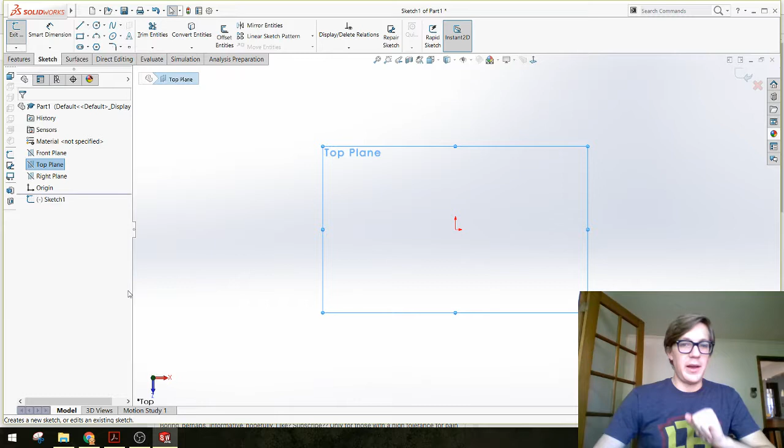So I'm just going to choose the top plane right now. Doesn't really matter. And create a sketch, and I'm going to make the base of my mailbox. All right. And I'm just going to add some dimensions that are dimensionally close. Again, this is a mailbox, so I'm keeping in mind about the size of the letters or small packages I imagine our users of this mailbox are going to be depositing or withdrawing.

So let's just say this is going to be about, I don't know, 120 millimeters wide and about 225 millimeters deep. We can always adjust those later. Notice my lines are all nice and black as opposed to blue. It means I'm all completely dimensioned. Nothing can move around on its own.

And I'm going to go ahead and extrude this to the thickness of my material. Everything I design for this mailbox is going to be the thickness of the material I'm cutting, which I mentioned before is 0.25 inches. Now if I type in 0.25 IN, hit enter, SolidWorks, good SolidWorks, is smart enough to convert that over to millimeters because I'm working in a metric environment, and that's great. So 6.35 millimeters is sort of the magic number. You'll see that pop up time and time again.

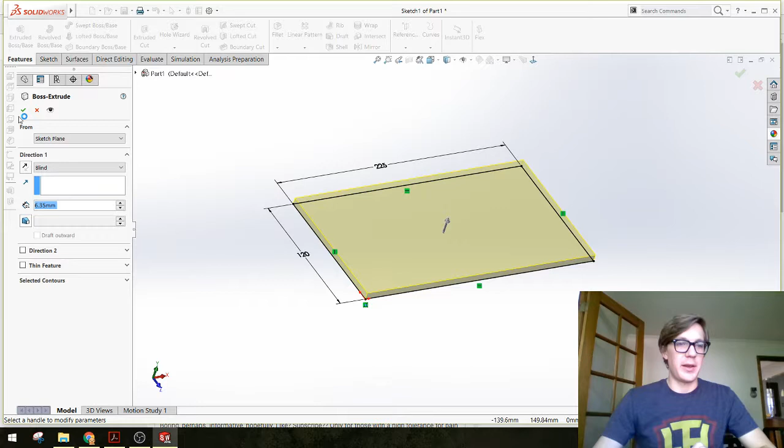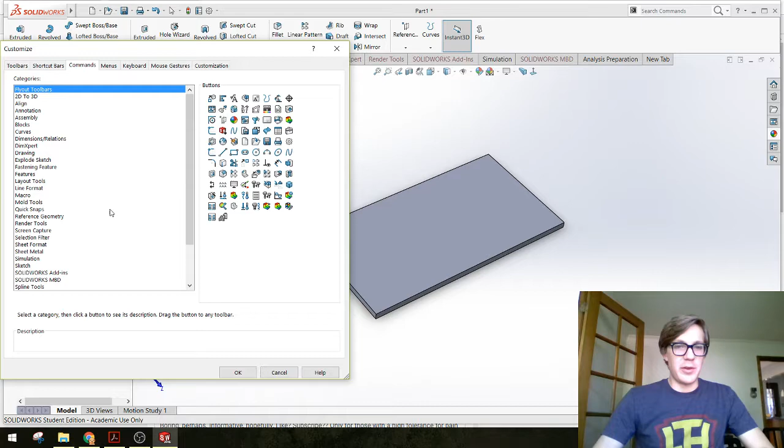I'm going to go ahead and say OK, and there's the base of my mailbox. Great. I usually like to look at it with perspective on. There's this little perspective button. Again, if you don't have any of these buttons in your menus, we've covered this a couple times, but you can always customize what's in your menus by opening up the customize menu, searching for the commands, and then dragging them in wherever you want them. You can also search up here for commands. As I think Dexter was mentioning before, you can search for a command, say like perspective. There it is, and I could drag this out and put it on my toolbar. Side note.

Okay, so I've got one component, and first thing, now that it's built, I'm going to save it just to make sure things don't go crazy. I'm going to actually start a brand new folder for this. All of the parts and the assembly file that you're creating should be in their own folder, and that's going to help transferring your files or moving things around a lot easier in the future.

So let's see, I actually have a folder for this already, and usually when I know I'm working with an assembly, I'll start by naming this, like this is a mailbox base part. I'll put the word part in the file name. It's easier for me to remember what parts are parts, what are assembly files, and you'll see as we build all these out why that's important. All right, so save, there we go. Okay, I have one part. Now I can get started on my assembly.

There are a couple ways to bring a part into an assembly file. The first way I'm going to show you is, if you move your mouse over to this little caret, go to the file menu, you can say make assembly from part. So I'm going to click that. That's actually going to create a brand new file, which is a completely different file type called an assembly. You'll see up at top here, Assem1 is the default name. And it's going to bring up this little menu that says begin your assembly with that open document. And all I need to do is say green check mark. And SolidWorks will bring the part I was just working on into my assembly file.

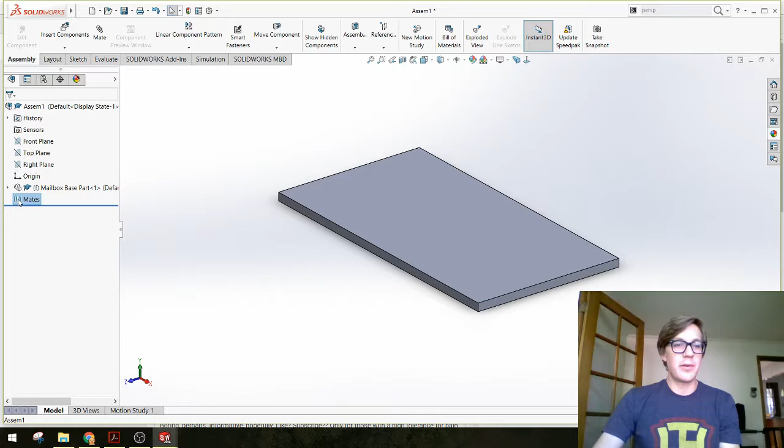It looks almost identical to what I had just built. Actually, this geometry is identical. What's different, there are a couple things. One, you'll notice I have a brand new tab up here in my menus, which is the assembly tab, and it has a whole bunch of special things that we can do in an assembly we can't really do in a part. We'll get into that. You'll also notice that in my feature tree, I have the normal planes, history, sensors, origin, but instead of features, I have the entire part. There we go, mailbox base part 1 is sitting over here in my feature tree, and it has its own set of all of the things that you would find in a part file. You'll also notice that there's a mates area, and we'll get into mates pretty soon too.

So, okay, I've started my assembly. I'm going to go ahead and save that as well. I like to name assemblies like assembly, and this is my mailbox. And I'll say okay, it's in the same folder that my other parts will be saved in, and we'll note that it's an assembly type. It's not a part type. So I'll say save. Wonderful.

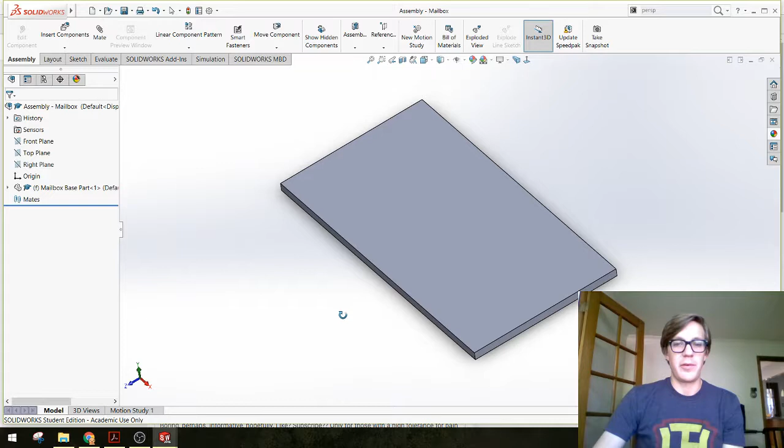Okay, let's start a new part, a brand new part, and I'm going to build one of the sides of my mailbox. So here we go. Oops, show that. Just hide that again. Start a sketch. And the side of my mailbox, well, I'm going to make it a rectangle. And let's say I would like it to be 150 millimeters tall. Maybe a little taller than that. I can always change it.

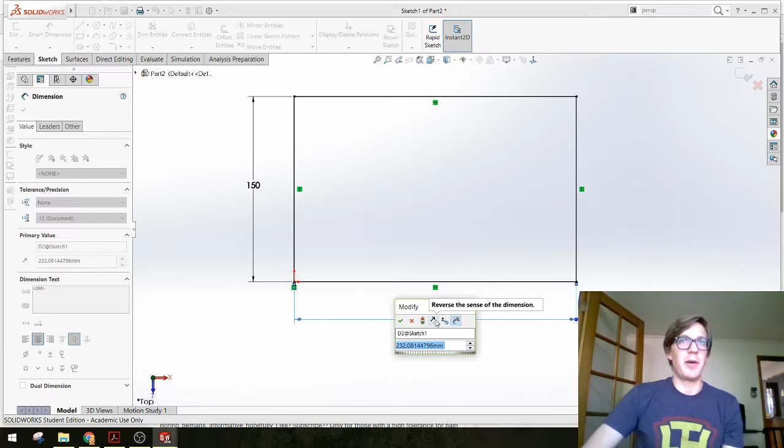And how wide? Well, I guess how deep, how long should this mailbox be? Probably I want it to be about the same length as the base of my mailbox. And if I don't remember, what was it, like 225? I'm going to put that in. Hit escape to get out of my dimensioning tool. This is the first little pro tip.

If you have multiple part files and assembly files open, you can hold the control button down and then tap tab to bring up a list of all of the things that are open right now in SolidWorks. And you can use your mouse to click one, or you can press tab, press tab, press tab to sort of cycle through. I'm going to go back to my mailbox base.

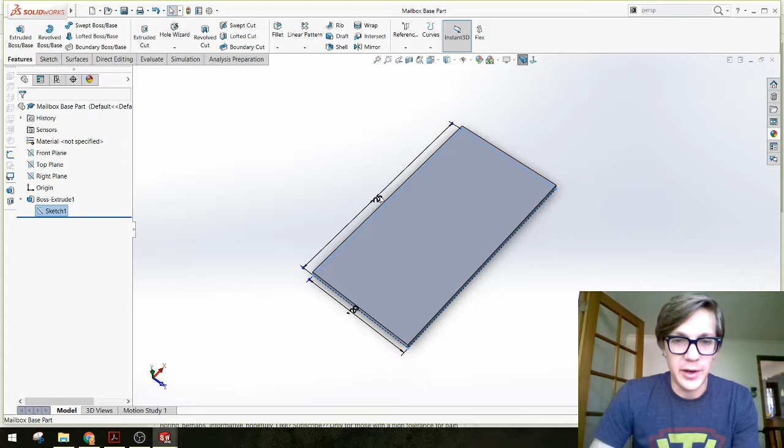Remember, we built this first, and take a look at the dimensions and just double check. Yeah, 225. Okay. Now I'm going to go back, control tab to get back over to my part, and make sure that it matches up. Yep, looks good. We're going to extrude this 6.35 millimeters. That's the thickness of our material. I'm going to say green check mark. Okay. I'm going to save this part, Control S, as my mailbox side part.

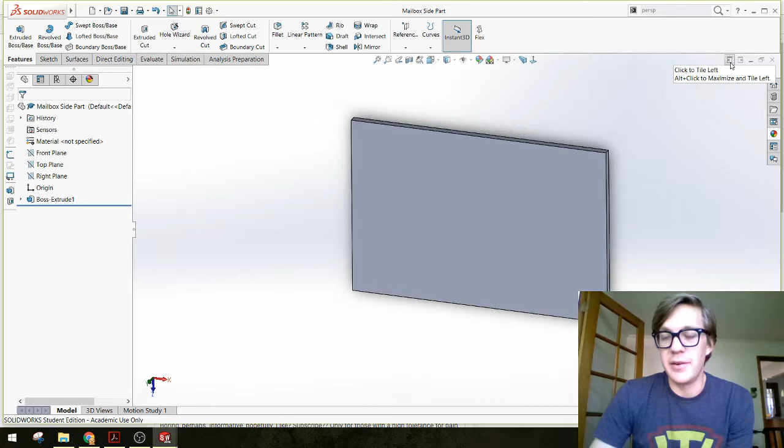Okay, cool. Now, last time we went up here and said File, Make Assembly from Part. Well, we already have an assembly file started, so I don't want to use this option. Instead, I'm going to go back to my assembly. The other way that you can do this is, actually, these buttons are kind of neat too. Each of the files that you have open in SolidWorks has its own window. It can get kind of confusing.

You can maximize, minimize. Really, you can minimize a bunch of parts until you find the one that you want. Mailbox base part. No, I'm looking for the assembly. Aha, assembly mailbox. I'll maximize that guy. And there we're looking at our base part. I want to bring in my side part into this assembly.

So one of the other ways that you can bring a part into an assembly is in one of the tabs up here called Assembly. In the Assembly tab, you can insert a component. So I'm going to click that. And which part or assembly, yes, you can insert an assembly into an assembly. Which part do I want to insert? I want to insert my side part.

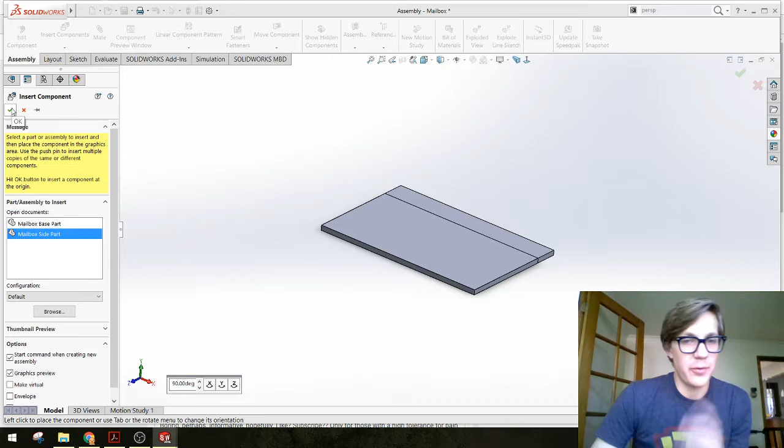And I could say green check mark, but for a reason I don't want to talk about at the moment, I'm not going to do that. Instead, I'm going to use my mouse and just click somewhere out into my build area, place this component. And you'll notice, well, it's not oriented correctly. This is where one of the most important tools in an assembly comes in, and we're going to get into it right now. It's called mate.

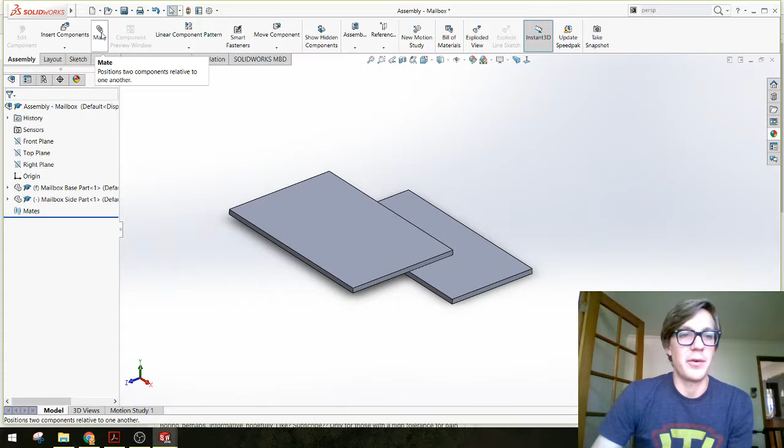So a mate is a constraint, kind of like the constraints that you can add inside a sketch to make two lines perpendicular or parallel or coincident. Within an assembly, we can use a special kind of constraint called a mate to attach entire parts to one another in a specific way. And there are a couple ways we can do this. The first one I'm going to show you is I open the mate menu. So click mate. I'm going to use two faces. I'm going to mate them together, make them flush.

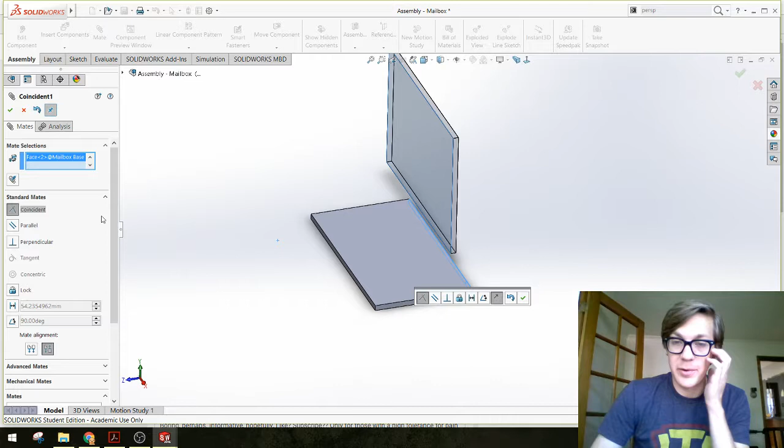So I'm going to click one face, and notice I click it and it kind of disappears and also highlights it. So I'm going to attach that face to this face. And you'll see that SolidWorks kind of reorients the part in the way that I would like it to be mated. And it's a coincident mate. By default, SolidWorks will kind of pick one that it thinks you want to use. You can hit green check mark on the little special menu that pops up, or you can hit green check mark up here.

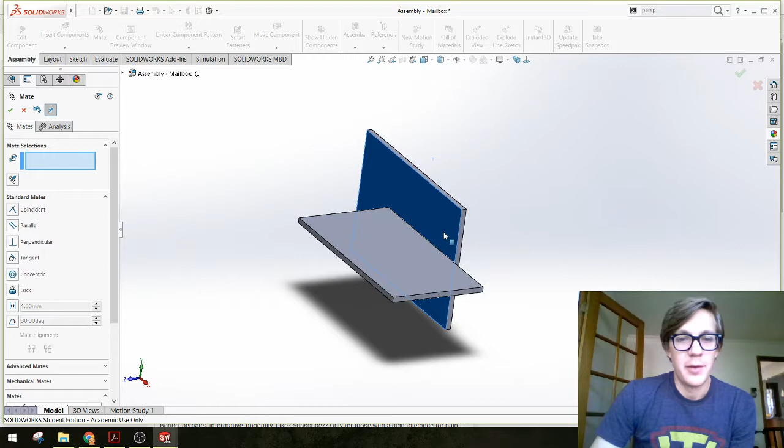And then this menu should stay open to let you add other mates. If it doesn't, just go back into mate, it'll reopen. All right, so that's one mate. Now notice I can still drag this part around, but no matter where I drag it, it's coincident. My face here that I selected is touching the face here that I selected.

All right, let's make this face and this face coincident also. See what happened there? They're all lined up, and again, green check mark. I can still move this thing around, and I think I want this face and this face to be coincident also.

Just as a point of an interesting other thing that you can do, let's say I wanted to leave a little space. Maybe I want my side to hang down a couple millimeters to leave the base not flush. Once I pick two faces, another mate that I can add is a distance mate, as opposed to a coincident mate, and it will let me add a dimension, say 5 millimeters, that those two parts, green check mark, maintain.

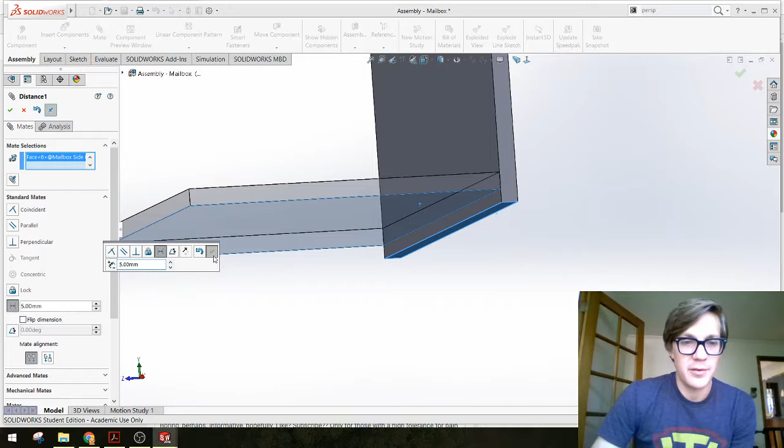So this part, if I try to drag it around, still is fully defined. It can't be moved, but it has that distance inside here if I want to keep that distance. Okay, so there we go. I have two parts, my side and my base. In my assembly file, I'm going to say green check mark, all done with mates for now, and Control S, save my assembly. Great.

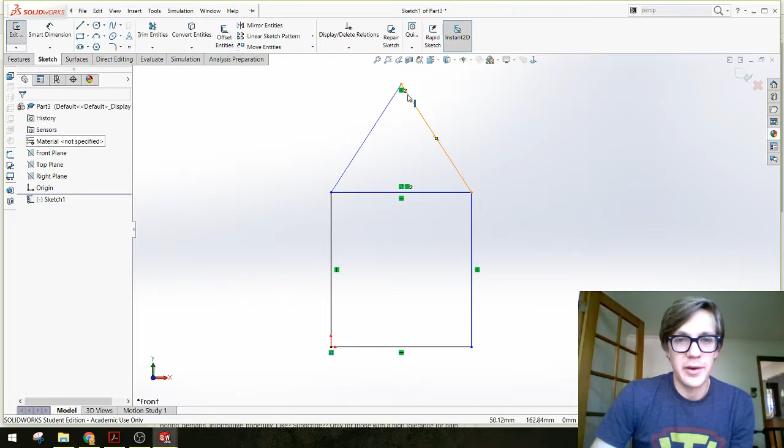All right. Next thing I'm going to do is build the back of my box here. And just like the other demo, I'm going to make it a different shape, kind of make it look like a house. So let's start yet another part file. I'm going to make a sketch. I want this to look something like a box with a roof on top of it. Let's see here. Maybe to make this, make these constrained vertically so that it always stays in the center. It's kind of neat.

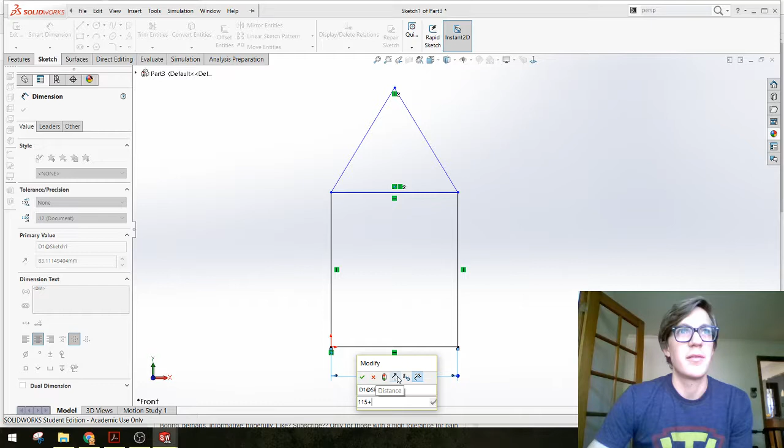How wide should this be? Well, how wide was our base part? I think it was 115. And I think I wanted to cover both material thicknesses, and you'll see what I mean here. I'm going to add 6.35 twice. And I can actually type in plus 6.35 twice, and it will give me a new width. You'll see why I did that when I import this part in.

I want this to be the same height as my other one, which I think was like 150 maybe. I can always go check this. I want my roof to be maybe another 75 millimeters tall. Again, this is all based on whatever design it is that you've sketched out that you're trying to mock up. And it looks like all my lines are black.

I am going to get rid of this line in between here for my extrusion with the trim tool. Power trim is my favorite version. I'm going to click and hold, and you'll see I'm dragging this trim line and cut that out. Oh, it looks like it got rid of one of these dimensions. Oh, and it got rid of my constraint too because I deleted the line. The other thing I could do, I'm going to undo, Control Z a couple times here.

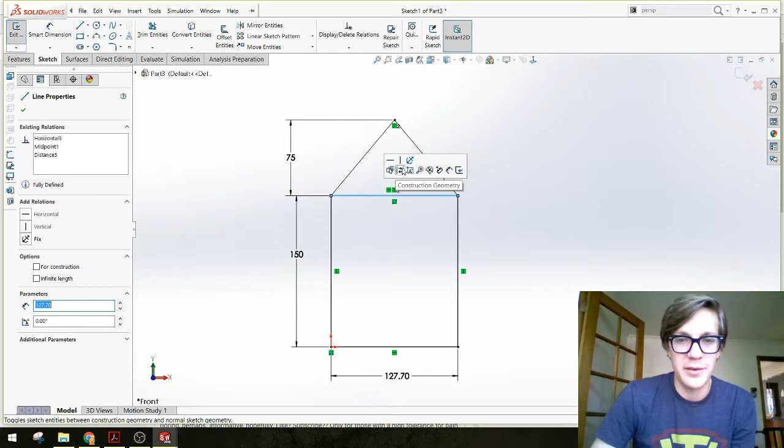If I don't want this line to interfere with the extrusion I'm going to do, I can change it to construction geometry with this little shortcut, or over in the menu here say this line is for construction. It will turn it into a dotted line, and now you can see I have one continuous shape that I should be able to extrude, once again 6.35 millimeters, to make my house shape. All right, let's double check those dimensions really quick.

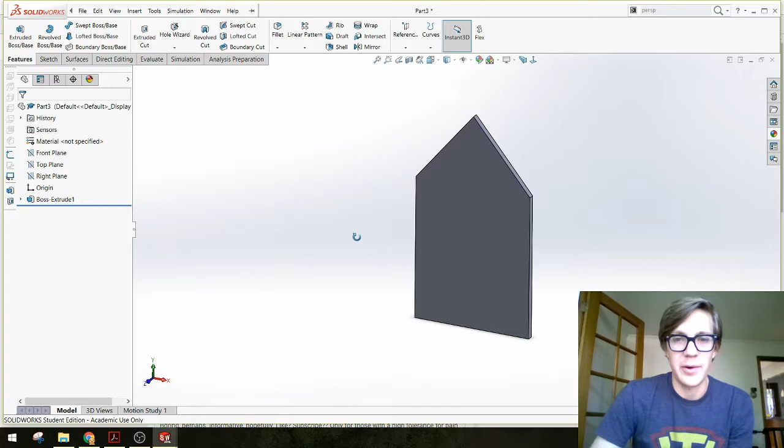So I'm going to go back to my side part, click on my boss here, the dimensions should pop up. It's 225 long, 150 tall. I'm going to Control Tab back to my part here, 150 tall, and I guess the length isn't important, 150 tall. Is that right? I already forget. Yeah, 150, okay. Cool, so that part's ready. I'm gonna Control S, save that.

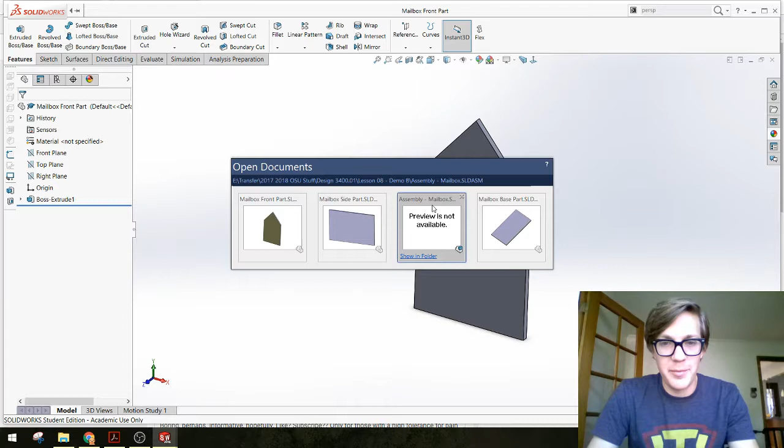Mailbox front part, save. Control Tab over to my assembly. Notice it says assembly, mailbox. Here it is, and I'm going to import a part once again using my insert components. Mailbox front part, there's the part. I'm just going to click somewhere out here to put it where I think it should go. And I'm going to use mates again to get this lined up.

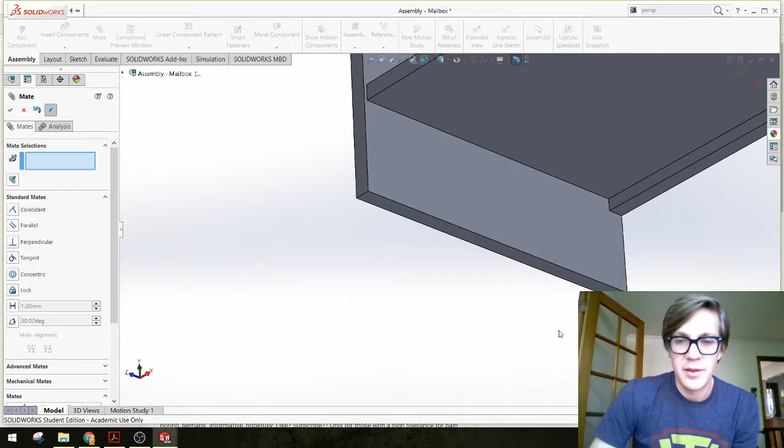All right, so let's say I want this face to mate up with this face, and then green check mark. I want this face to mate up with this face, green check mark, and I want this face to mate up with this face, green check mark.

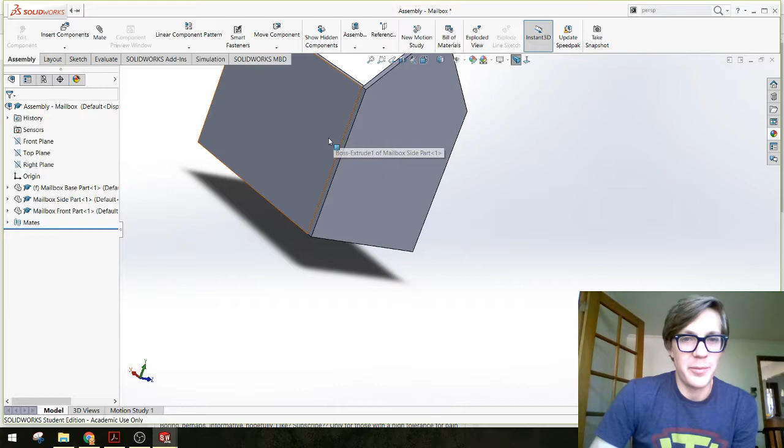All right, now it looks like I might not have had quite the right dimension on the width of this part. Oh, no, I don't want to start another mate here. You can see that I wanted the edge of my face here to be lined up with the edge of the side part. Hopefully, if I added another side part to the other side of my box, this edge would be flush with the outside of the box too. It doesn't look like that would be the case. So there are a couple ways that we can change this.

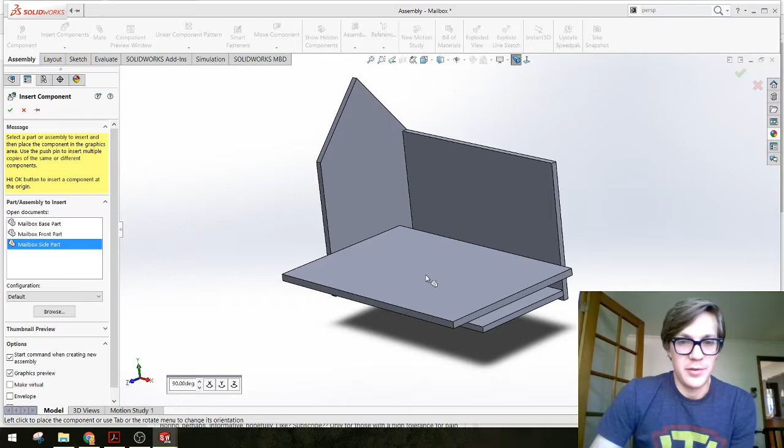Before I get into that, so I make sure I have the right dimension, I'm going to show you another fun tool in assemblies. This is based on a question I think Tessa asked during class. She asked, can I bring multiple instances of a part into an assembly? And the answer is yeah, absolutely. Let's say I want another side for my mailbox here. I can insert a component, choose mailbox side part again, just click somewhere out here, and here we go. I have a completely separate instance of my side part, which then I can mate.

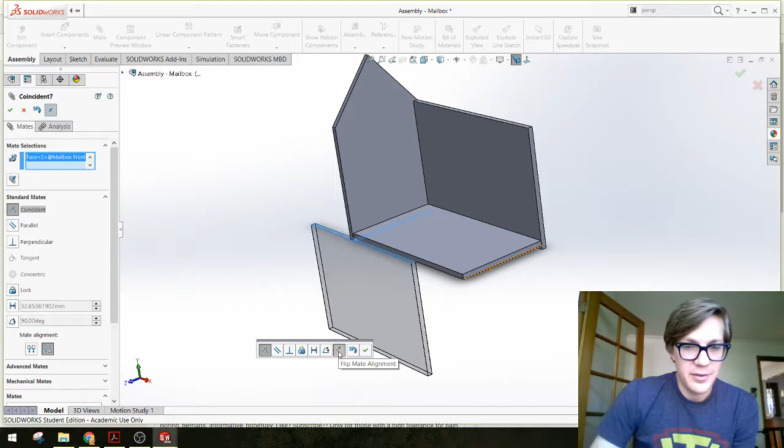So I want that coincident with that. Now notice that actually flipped it sort of the wrong way. There is a flip mate alignment button that will let you switch things around if the mate that you're trying to add ends up being sort of the opposite. I want that face coincident with that face, green check mark, and I would like this face to be coincident to that face, green check mark.

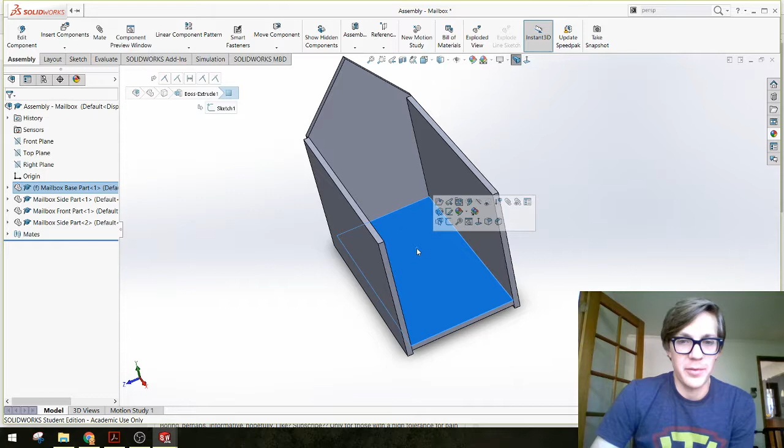Okay, now you can see what I'm talking about here. I wanted this edge to sort of cover up the face of this thing right here. So green check mark out. Let's check some more dimensions. All right. Now, I know I've been doing a lot of control tabbing to get to other parts. Another way that you can go back and see a part or edit a part is click it in the assembly and then use this little open part icon that pops up, and it will bring you right to that part file.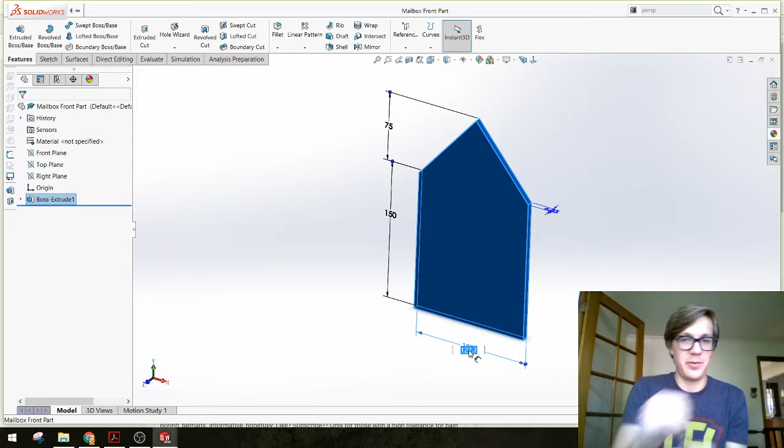Let's see. So this is 120 millimeters. I think I typed in 115. So 120 millimeters is the width of my base. And if I control tab over to my mailbox front part, I think I mistakenly said this was 115 plus 6.35 plus 6.35. Remember, I was trying to add extra material to cover up two material thicknesses. I know now it's 120 millimeters plus 6.35 plus 6.35. Say OK. Save this part, and then go back to my assembly.

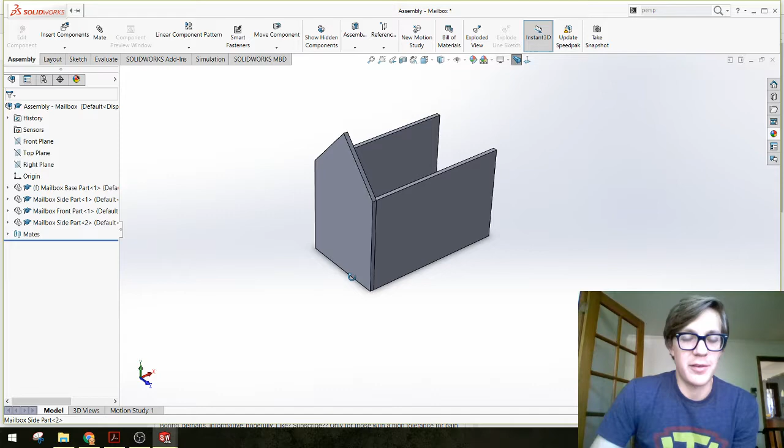Now, when you update a part that is also in an assembly, chances are this little warning is going to come up that basically asks you if you want to update the assembly to match the changes you made in the part file. And I said yes. Okay, and now you notice that extra dimension updated everything, and the front of my mailbox now covers up all the edges. That's what I wanted.

Okay, now I could bring another instance of this part in. Actually, you know what, why don't we do that really quick? So I'm going to save my assembly. Again, with SolidWorks, just save everything all the time. SolidWorks likes to crash at just the right moment. I'm going to insert a component. We're going to add another front part. Just drop it somewhere in my assembly.

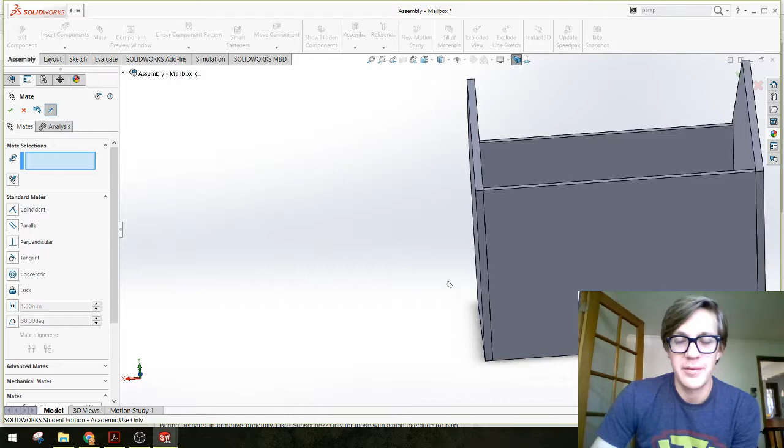Use mates to make this face flush with this face, green check mark. This edge flush with that edge, green check mark. And the bottom here flush with the bottom here, green check mark. Okay. I've got a box, starting to look like a house. I guess we're getting close to what I want this thing to look like. Green check mark. I'm going to save one more time.

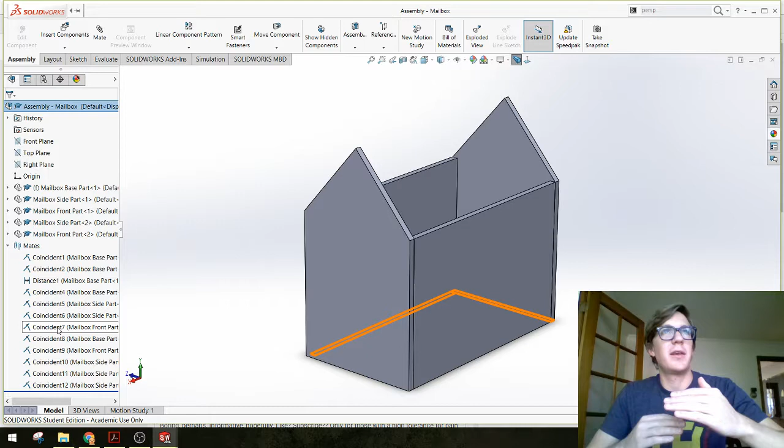All these mates that we've been adding have been populating in this mate list over here in the feature tree in your assembly file. This is important because sometimes when you edit a part or you change a part or you delete a part, things will blow up, just like in a part file. If you change something, features will turn red and give you an error.

A lot of times in an assembly, what can go wrong when you change a part is mates, like other relations, they'll stop working. So you can go back into any one of these mates and edit it, delete and reselect faces, or just get rid of the mate altogether. Anyway, that's where that lives, and we'll see if we can't get something to fail so I can show you how to troubleshoot it and fix it.

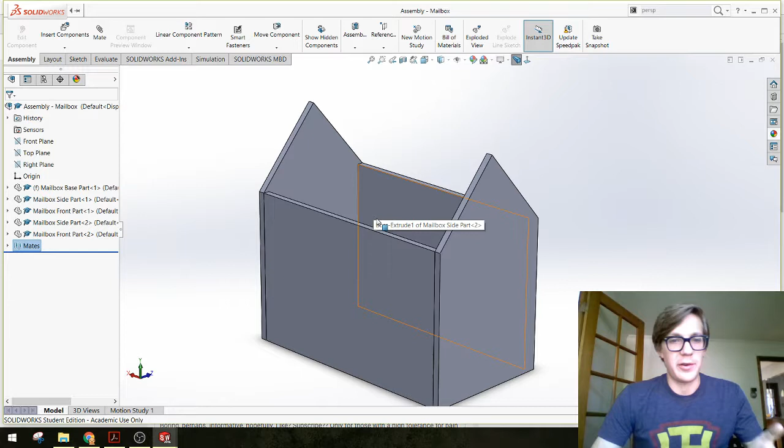Okay, so far we have built a few parts as independent part files and brought them into an assembly. And now I'm going to show you a different way to create a part for an assembly. And this, I guess, has its advantages and disadvantages too. So another way that you can add a part to an assembly is creating it inside the assembly from the get-go.

So under the Insert Components feature in your Assembly tab, if you hit the little caret, in addition to Insert Components, you can also say Create a New Part. So I'm going to create a new part, and you'll notice, maybe, that by my mouse there's this little green check mark that appears. SolidWorks wants me to click somewhere in this viewport to start my new part.

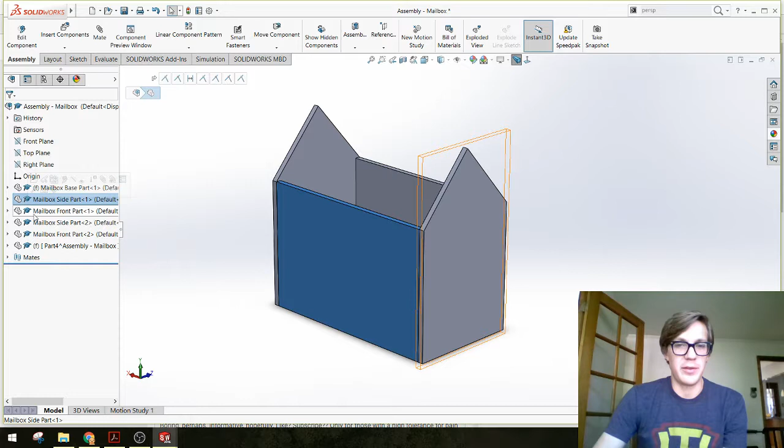Just know that this happens, and you have to do it when you create a new part inside of an assembly. You'll see a brand new part appear in my feature tree with a default name, Part 4, Assembly, Mailbox. It just added a new part, but there's no geometry in that part yet. If I click this part, unlike the other parts, nothing is highlighted because there's nothing in that part yet.

In order to add geometry into that part, there are a couple ways I can do it. I can open that part, which is a little abstract. What I'd like you guys to do is to edit the part. So I'm going to edit this part in the assembly. It's a part file inside an assembly file that doesn't have geometry yet. We're going to create some geometry.

When I edit the part, it will ghost out all of the other parts in my assembly and give me the same set of commands, like sketch tools and features and direct editing, that I have in a part file normally, only I can use these other parts as reference. So what I want to build right now is one of the roof areas for this mailbox thing I'm creating.

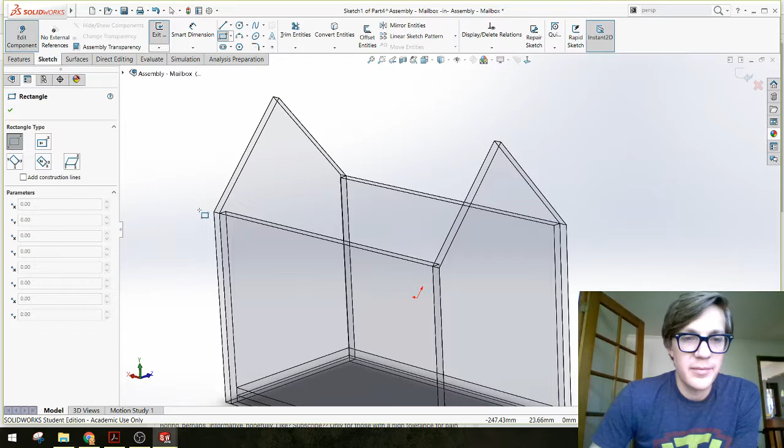Just like any other part file, I can sketch, and I'm going to pick one of these faces on the top of my roof to create a sketch. Say sketch, okay, and I'm going to make a box that's a little bit bigger than the top of this mailbox.

I can add relations, like between this line and the top edge of this part. Zoom in a little bit. I'm going to make them collinear. It's actually adding a relation to a part that's outside of the part file that I'm editing. Again, this is kind of abstract if it's not quite making sense in your head right now. Just know that we're creating a part in a slightly different way than you would if you're creating a part outside of an assembly file.

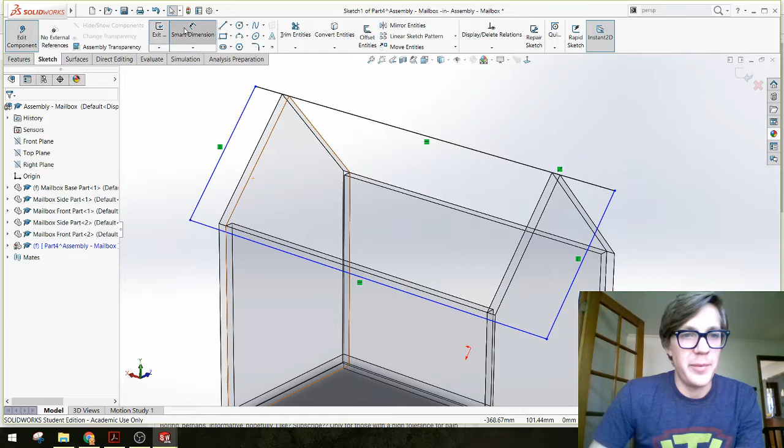All right, let's add some dimensions to this sketch here. Let's say I want the distance between the outer edge of my mailbox to the outer edge of my roof to be, say, 30 millimeters. I can still use the normal tool to square up and dimension things this way too. I want that to be the same, 30 millimeters. And I want my roof to be, let's say, 120 millimeters long.

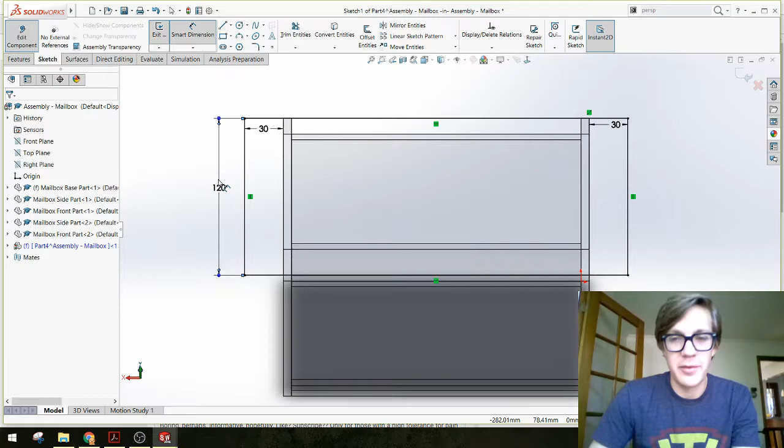If I rotate this, you can see I'm adding a little bit of an overhang to the edge of my house mailbox thing. Okay, that sketch, everything is black, so I'm happy with that. Go back to the Features tab.

Now notice one extra set of things is happening when I'm editing a part inside an assembly. I have this extra set of things on every single tab that say edit component, no external references, assembly transparency, this kind of thing. We're going to talk about this in a second. Ignore these for now. All of your tools that you're familiar with will still be in these tabs, just in a slightly different location.

So anyway, create an extruded feature. How thick? One material thickness, again, 6.35 millimeters or 0.25 inches. It should convert for you. I'm going to say OK.

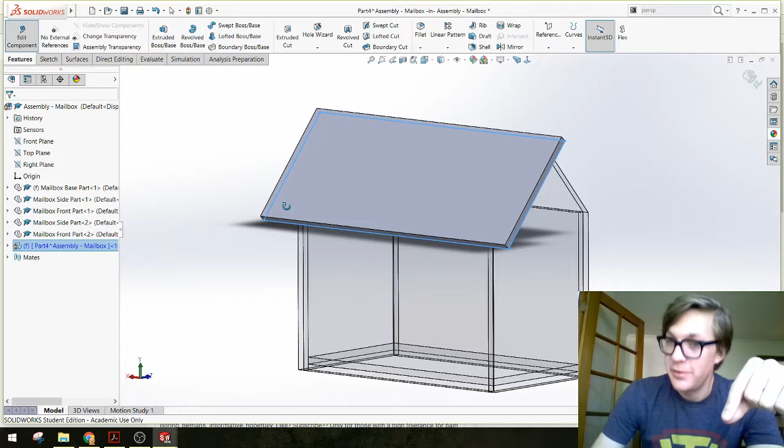Now normally when we create a feature in a part file, we have to pay attention to whether or not we want that part to merge with another part. That still applies here, except SolidWorks knows not to merge this part, or anything we create as part of the part we're editing, to anything outside the part file in the assembly file. This will never merge with any of these.

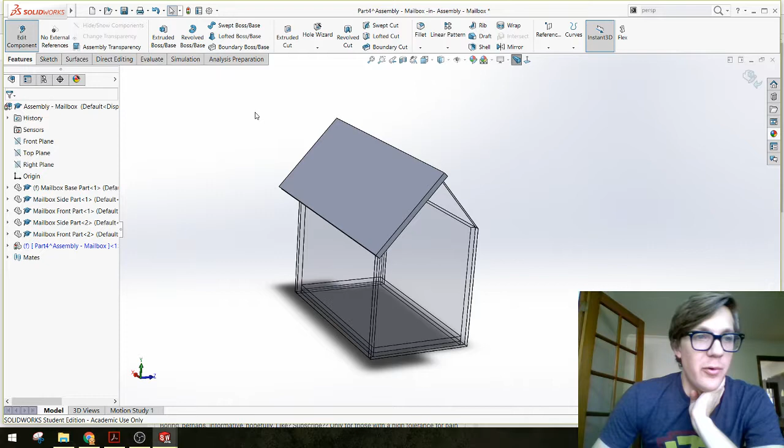Okay, so there's my roof, or part of my roof, and that looks about the way I want it to. So there's one layer I'm going to try to get out of to get back to editing things in my assembly. You'll notice over here, the same place where you would exit a sketch, or up here where it says edit component, if I click this, it will bring me back out of the part file I was editing inside the assembly file, and now we're back into the assembly file itself.

You can see that all of my parts are unghosted, and they look the way you guys are used to seeing. All right, let me save really quick. Ooh, an extra menu popped up. The following models referenced in this document have been modified.

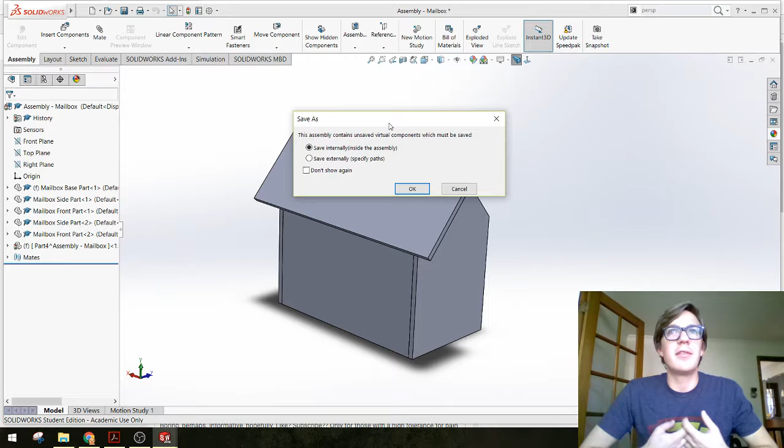They will be saved when the document is saved. It's talking about this random part we created that we haven't given a name, our roof part here. It hasn't been saved at all. So I'm just going to go ahead and say save all. SolidWorks will ask me whether I want to save it inside the assembly, like as a part of the assembly file, or save it externally as its own part file. For now, probably the easiest thing for you guys to do is just say okay, save it inside the assembly, and leave it at that. I'm gonna save one more time just to make sure all of those options happened.

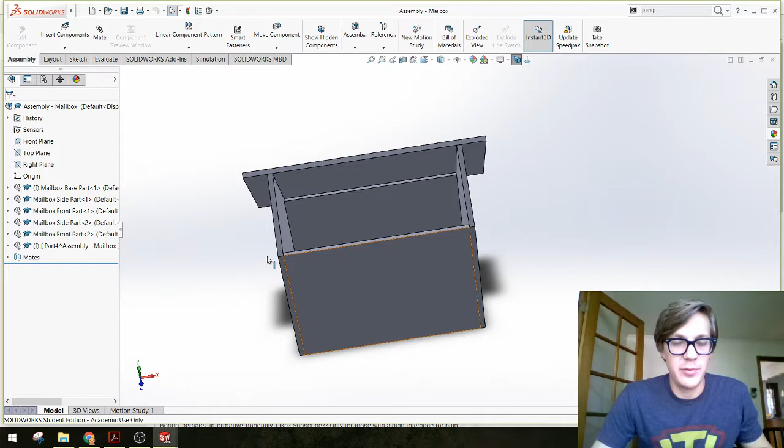If this menu ever pops up about rebuilding your document before saving, go ahead and rebuild. Okay, so I have a roof. I've got front twice, front and back, two sides, a bottom, and part of a roof. Let's create the other side of this roof really quick. And let's see, is there a third way that maybe I want to do this?

Well, that's interesting. Actually, as I'm looking at my part file from this direction, and I'll turn perspective off, notice the angle of my roof here on this part must not be 90 degrees, unlike the material here. And if I want the next part of my roof to line up perfectly, I could go back and edit this part. So let's do that really quick.

All right, once again, let's say I have a part inside an assembly that I want to change something about. There are two ways to do it. I could click this part, say open it, it will open the part file back up, and I can go back into my sketches and change things. That's one way to do things.

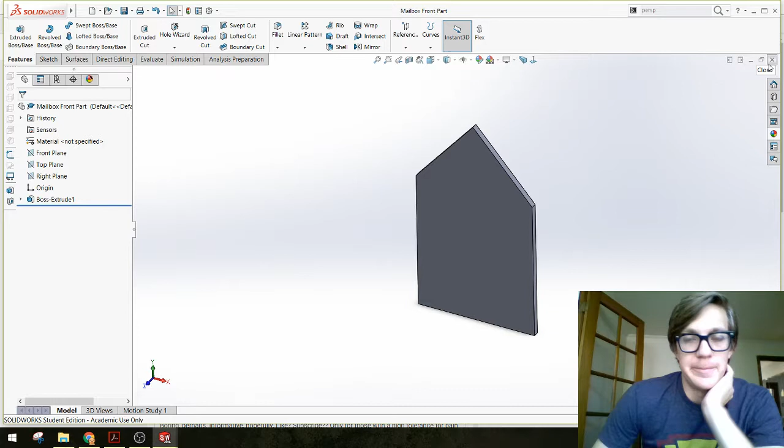The other way that you can do things, let's go back to the assembly, is click the part, and instead of opening it, I can just go right into edit it. Where is it? Edit part. I could click it here, or I could click over here and say edit part. Same kind of crazy thing happens, right? All of the parts I'm not editing get ghosted out, and I can open the feature tree for just this part inside my assembly file and mess around with things.

For example, let's say I want to change this sketch. I'm going to edit the sketch. Let's square up to it and change this so that it's a right angle. Now I have a feeling if I try and click these two lines in my sketch and say make them perpendicular, ooh, things are going to get angry.

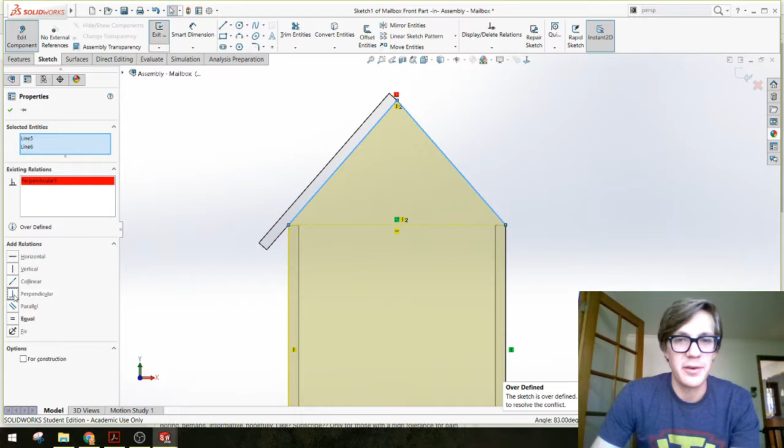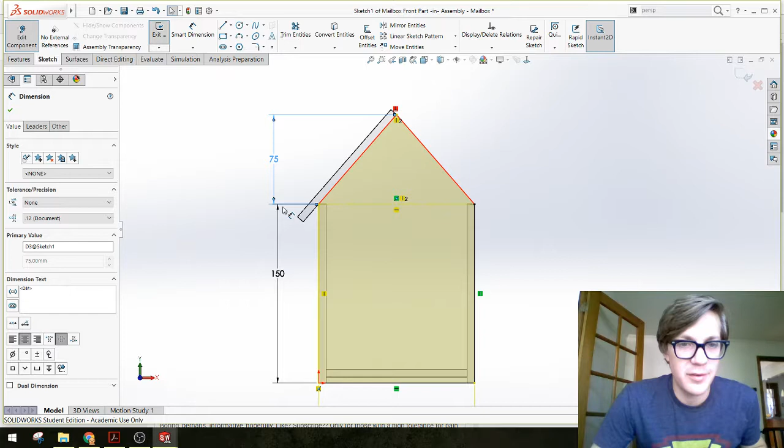And I have a feeling, I know why, it's probably because in order for those two lines to be perpendicular, this point is going to have to move, either up or down, probably down. So right now my sketch is over constrained. SolidWorks can't figure out which things it should follow to create the sketch. I'm going to click this dimension here and delete it.

And it looks like that's all it took to fix my problem here. Now if I went back in to add a dimension between this point and this line just to see how tall it was, it's going to ask me if I want to leave it driving, meaning have SolidWorks treat it like it's trying to tell the sketch exactly how tall to be. Once again, you'll see everything starts to go yellow or red, which means it's unsolvable.

I could also change it and say, make this dimension driven. And I'll show you what that means really quick. Basically, it leaves this dimension grayed out. This dimension is not actually controlling my geometry. It's just sort of there as an indication of how tall this box is. That's kind of a wormhole side thing, but I figured we could talk about it because it was something I wanted to change.

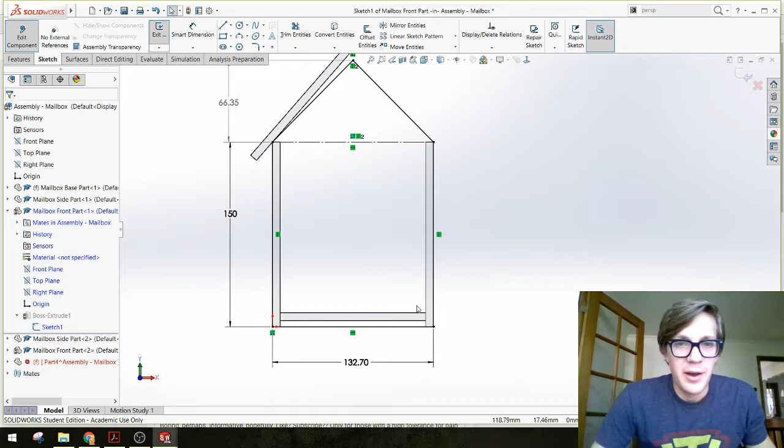All right, I'm going to get out of my sketch. Notice the part updated. And if I get out of the part, notice that the assembly updated too. The mate that we added between my roof part and, oh, I guess we didn't add any mates because we built it as a part inside an assembly. Everything updated and we're okay.

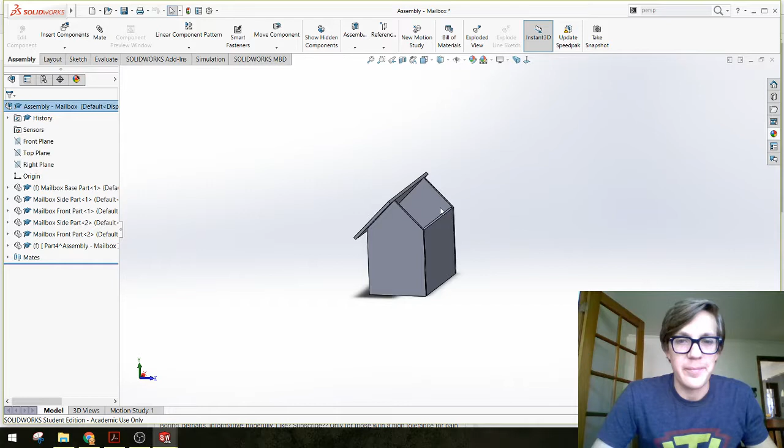That's cool, and it looks like everything is all squared up. So I can create one more side of my roof. Great, so let's do that again. I'm going to create a new part inside my assembly. And again, I have to just click somewhere out here to say yes, I wanted to create that part. The part has no geometry in it. In order to add geometry, I have to open the part file or edit it. Let's edit that part I just created.

To make a sketch, I'm going to have to pick a plane to sketch on. I'm going to sketch on this side of the roof. Sketch. We're going to make a box.

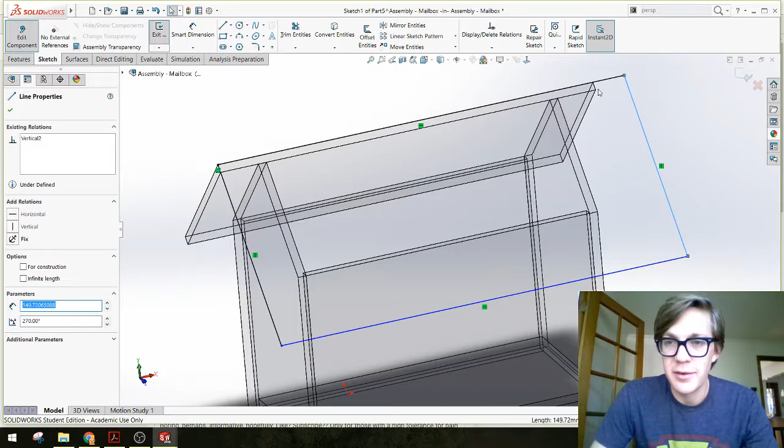Notice when I created my box, I picked the corner, the top of my roof part up here. I'm also going to constrain this line so that it's even with my roof. So I shift click to the edge of my roof file. And then how long do I want this to be?

Now I'm thinking I could probably say I want this line to be even with this line, collinear. Oh, no, didn't work. Let me undo that. That did not work the way I was expecting. Oh, because, yeah, I see what's going on. Alright, instead, maybe I can say make this line...

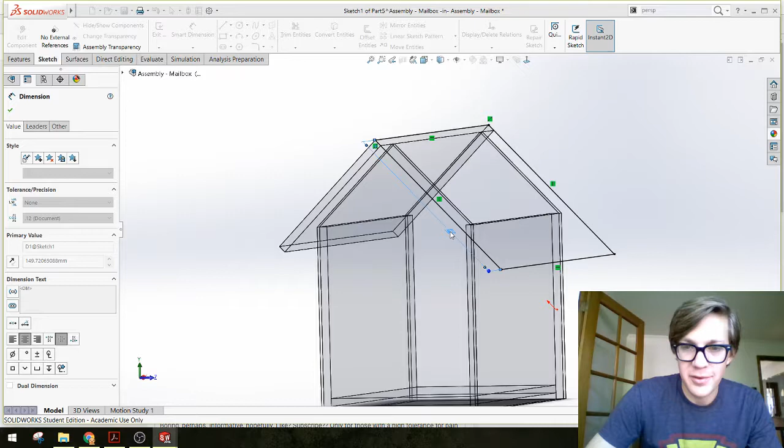You know what? I might just have to dimension it. How long should this be? I already forget, like 150. No, that looks too long. You know what, I'll leave it as 150 and we can go check.

I'll get out of the sketch, go to my feature, say extrude, 6.35 millimeters. Okay, there's my roof. It's a little too long on that one side. There are a couple ways I could adjust it.

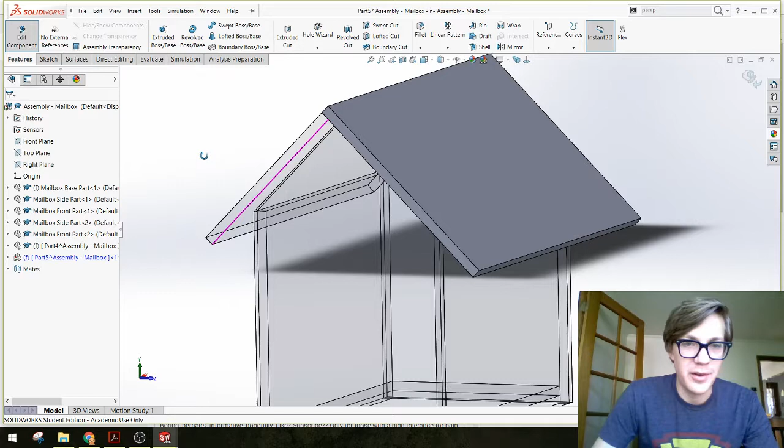One would be to go out of this part, click on the part that I want to measure. We can edit that part, open up its feature tree, click on the feature that I made, and see if I can... 120 millimeters. Okay, now that's one way I could do it.

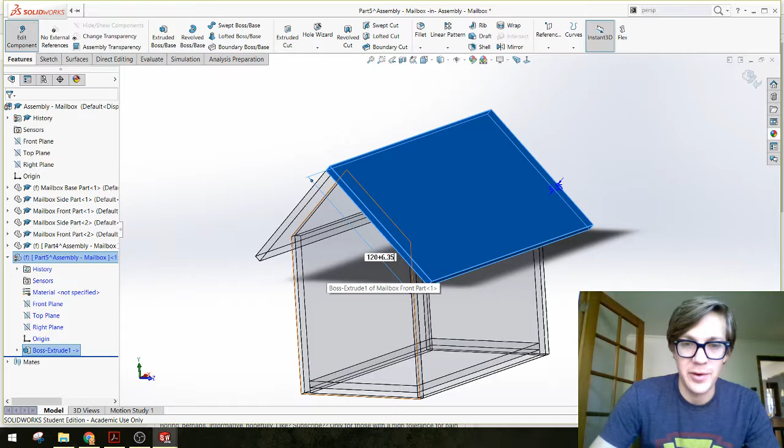I'm going to get back out of that part, click the part I want to edit, say edit the part, close the old feature tree, open the feature tree of the part that I'm now editing, click my feature, and say, oh, it shouldn't be 150, it should be 120 plus this extra material, because you can see this part's overlapping the thickness of the material here, plus 6.35. Okay, yeah, that looks even.

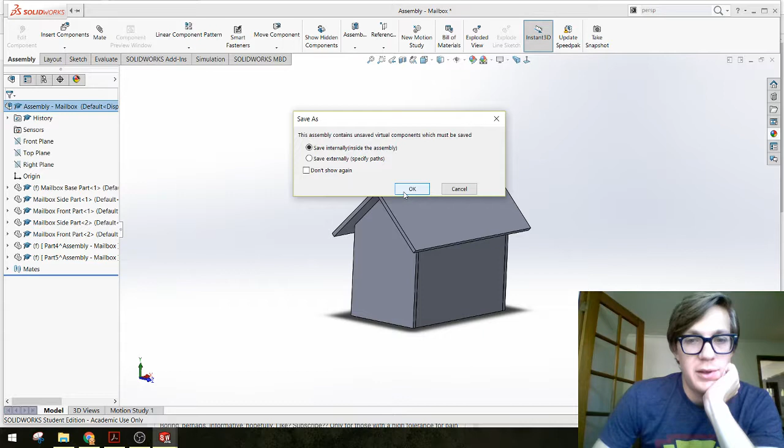Get out of the part, I'm just going to close this up. Yeah, that looks pretty even to me. I'm going to hit save. Once again, we created a new part inside our assembly. Yes, we want to save that too. Yes, let's save it internally, and that's fine. Let's turn on some perspective, and there we go.

So I've covered a few different things with creating parts, creating an assembly, importing parts into an assembly, placing parts inside an assembly with mates, creating parts inside an assembly and using references to other parts inside the assembly to make sure everything lines up. This is the level of sketch model you guys should be able to accomplish for this part of the assignment.

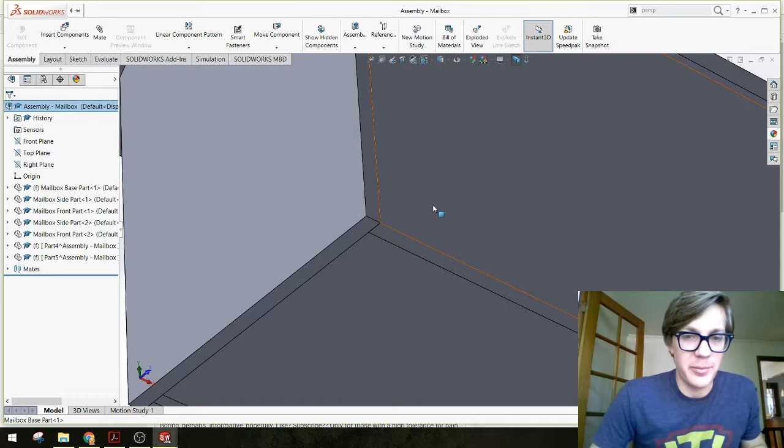Notice the joinery, like how these edges come together, is all very simple. We're basically mocking up a butt joint. It's the type of joint where if we added some glue in between this part and this box, it could exist in real life.

Now real laser cut parts have a lot of other types of joints that we can add: mortise and tenon, finger joints, and we'll go over that here in a second.

But for now, wow, we only have 20 minutes left. I'm going to go to my email really quick and see if there are any questions from you guys, if there's anyone watching this live. Let's see, there's someone watching live. It might just be me.

Let's refresh. Nope, doesn't look like anyone's here. So we're just going to keep cruising along.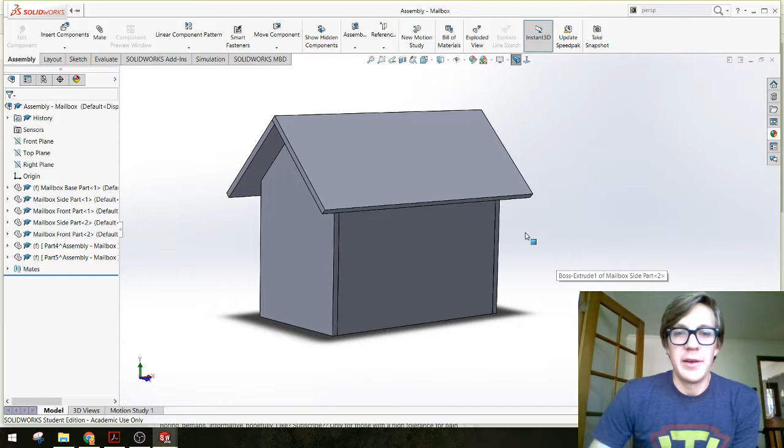Okay, SolidWorks, man, which one of these? The assembly. Okay, so there's my part. There are a couple other things I wanted to show you really quick. One of them, so I'm going to close all of this stuff out, all of my part files, my assembly.

I'm going to go back over to one of the other demos and open up a new assembly. This is something I created before class last time. This assembly has some more complex joinery used to hold these parts together.

And if we go to Carmen, you'll notice I posted a couple helpful links inside You've Got Mail Part 1. One of them goes to Instructables, which has a great little intro to things that you can make with laser cut parts. And if we scroll down a little ways, one of the things it talks about is different types of joinery.

Here we go, finger joints, mortise and tenon joints, a slot joint. There are a lot of ways that laser cut parts can be joined together. And that kind of detail, I don't think you guys need to include yet in your sketch models, the two that you're making over the weekend.

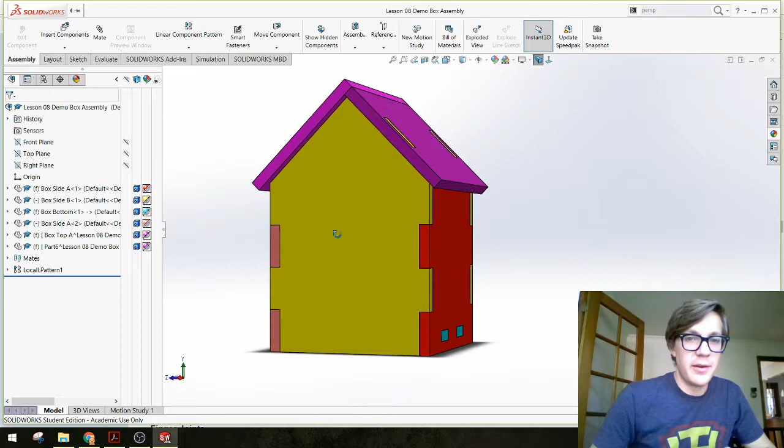But it's something we're going to talk about further during Tuesday's class. So just know that you can do it. Again, all of these parts, if I open one of these parts up, they were created independently as part files and then brought into an assembly file. And the great part about an assembly file is you can see, by using mates to attach things together, whether or not your part has a chance of existing in real life.

I was able to check and make sure that all of my joints lined up. And now I know with at least some degree of certainty that when I laser cut these parts out, my mailbox house thing should work. It should actually come together.

All right, so along those lines, the other reference that I wanted to talk about today was also in Carmen. It's a website called makercase.com. Now, I'm sure all of you are capable of figuring out how finger joints might come together to create a part in SolidWorks, but it's going to take some guessing and checking and maybe some sketching to figure out how everything works. There are a few websites, including makercase.com, that will generate finger slot geometry for you for a box of whatever dimensions you want.

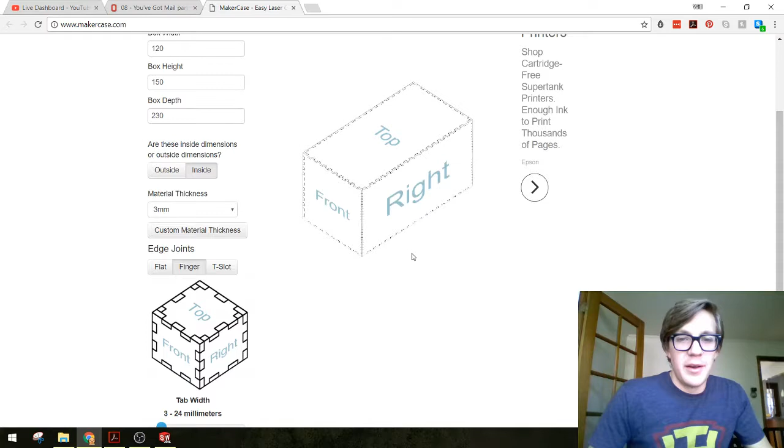In this case, let's switch to millimeters. Let's say we have, what was our box? Like 120 by 150 by 230. I don't really remember. Inside dimensions. This website will actually create a 2D sketch for you with all of the joints that you need to create the sketches to make your box and actually add joints. 6.35 millimeters thick material. Here's all of our joints.

So this brings me to the next thing I wanted to show you. Even if this particular tool isn't super helpful for your particular designs, it might be worth creating a box using some of this 2D geometry just to wrap your head around how these joints actually come together with a sketch, and more importantly, how we can use a 2D vector drawing generated from an online tool or even in a program like Adobe Illustrator and bring it into SolidWorks to create a sketch that we can use to create geometry. So let's do this.

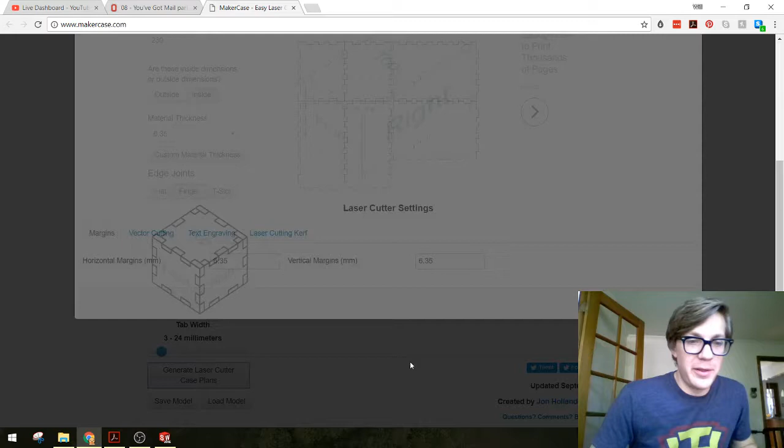I'm going to generate my laser cutter plans from this website and just make sure, let's see, it's vector stuff. These are all laser tool specific things that we don't have to worry about. I'm going to download these plans as an SVG document. SVG is just a type of vector format. Let's go to Demo C, and this is case plans version 2 because I did this once in class. I'm going to save them.

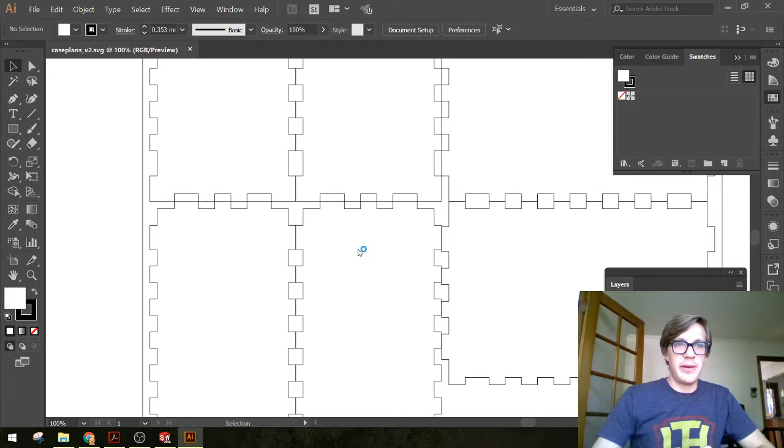Let's go to those plans. Now there are a couple different vector file formats that SolidWorks likes, and SVG I don't believe is one of them. So we're going to open those plans up in Adobe Illustrator. Hopefully you guys have access to that. And take a look. So I'm going to zoom out a little bit. Now I'm going to delete all of these different parts except for one because I'm creating one part at a time in SolidWorks. And I'm going to save, or is it export?

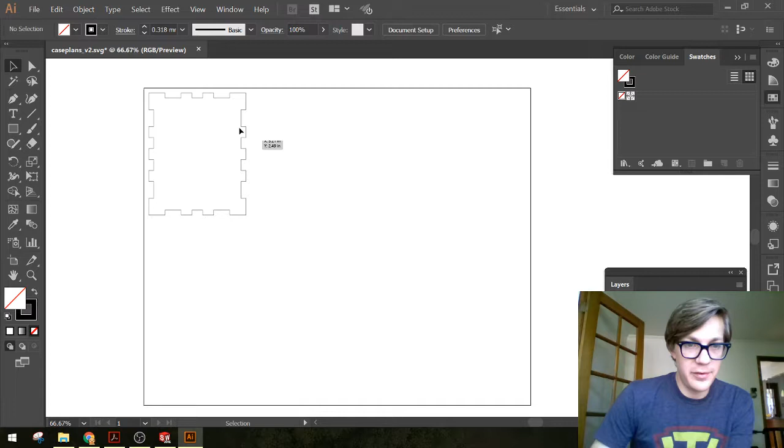I'm going to export this geometry, this single line, as a format that SolidWorks likes. SolidWorks likes DWGs and it likes DXFs. I don't really know the reason why you would pick one over the other. Both of them will work. I'm going to go with DXF because my wife Kayla mentioned that we should use a DXF in class the other day. Something to do with keeping dimensions. Anyway, let's just go with DXF. I'm going to say export.

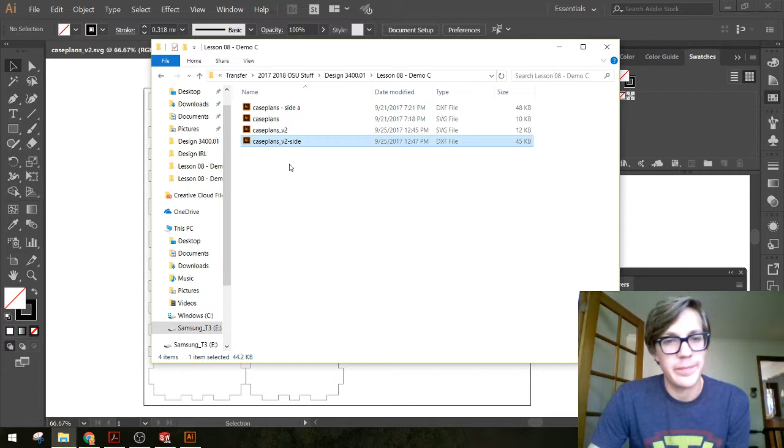Make sure that my units are millimeters and that the scale is 1 millimeter equals 1 unit. The rest of this is okay by default, and let's say Control Z and make sure I have all of my parts still in this file. Now if I go back to my folder, I do have a case plans version 2 DXF file, and I might even name this my side part, because I'm probably going to have to export each and every one of these as its own DXF file. I'm not going to do that right now. I'll just show you how to do it once.

We're going to go to SolidWorks and create a brand new part file, okay? And this is how you import a DXF into SolidWorks. I'm going to pick a plane and go to Insert. If I go up to Insert without choosing a plane, actually it is open. You want to pick a plane first. So I'm going to say front plane, that's where I want to insert my DXF file. I'm going to find it wherever I saved it. Say open.

And you're going to get a whole bunch of menu options. First one, you almost never have to change. Yes, I'm importing it as a 2D sketch. The next thing it's going to ask you is the units of your imported data. Just remember that we wanted this in millimeters. These other options you don't really have to mess with.

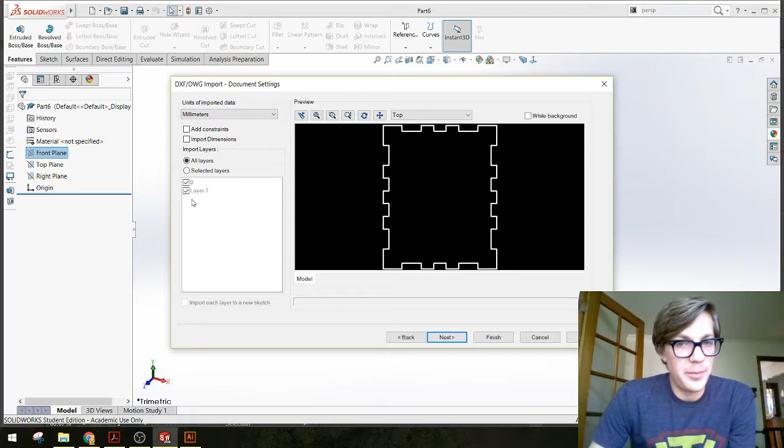Next, more options about merging points and adjusting things in your geometry. Don't have to worry about any of that stuff, and finish. This warning always comes up, and I always say yes. And if I zoom out, notice that it didn't look like anything happened. I kind of zoomed out.

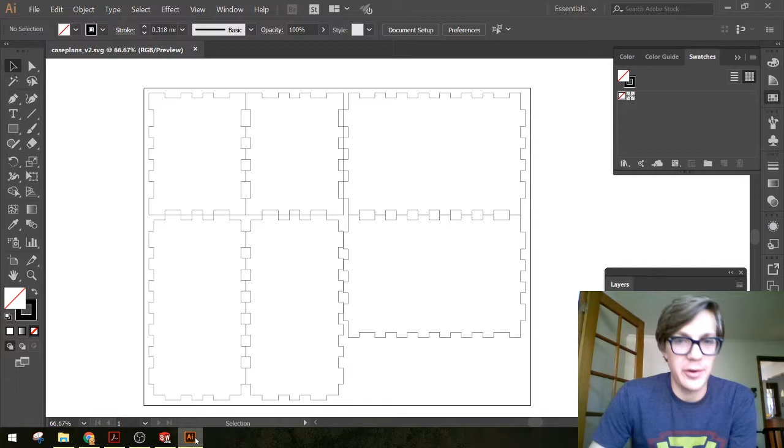Here are all the lines from my Illustrator file. These ones right here. And they're in SolidWorks. Hooray! Now, this is one very important thing I want you guys to try and remember. When you import lines as DXF into a SolidWorks sketch, usually they're all blue. And if I click and drag something, even if it's accidentally, it's going to mess up the orientation of these lines. Let me undo that with a Control-Z.

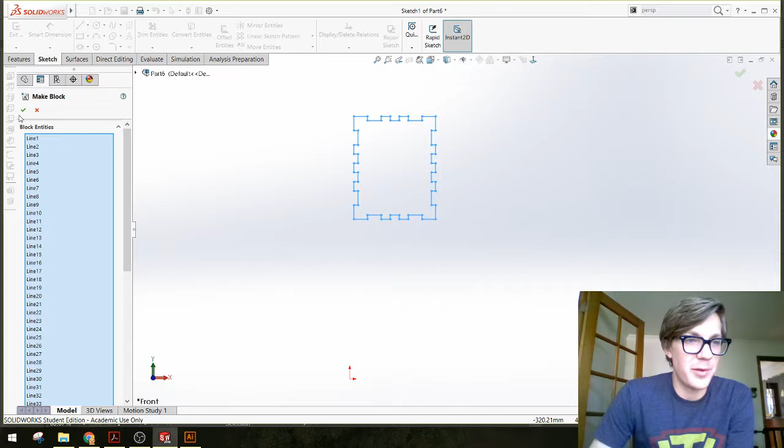One way to prevent that from happening is to click and drag, select everything in that imported sketch, and in a secret little menu that pops up, there's an option, an icon that says Make Block. That's what I want you to do. I want you to make something called a block with all of those lines. This menu pops up about Make Block. It has all of the lines inside this sketch selected, and I want you to hit green check mark.

Let me click off of there. Notice all of those lines turned gray. And when I click and drag to move this around, they all stay oriented, related to one another in exactly the way that I wanted them to from my import sketch.

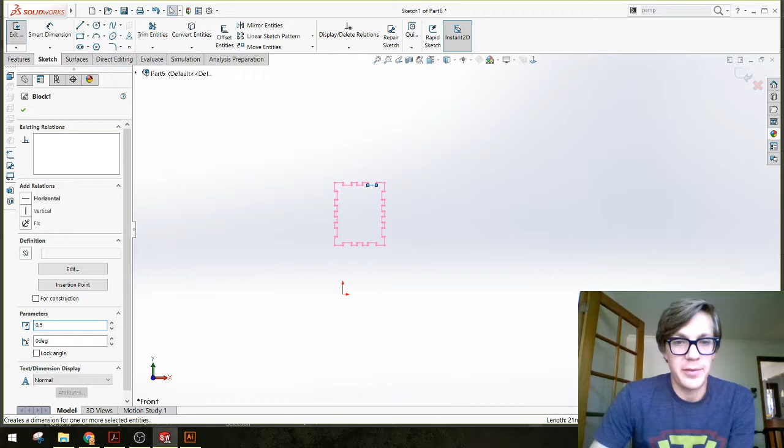Another great thing about making a block or a group of sketch items is if I click anywhere on this sketch, this block, a block menu will come up that will allow me to do things like rotate it or scale it. Let's say I only wanted this half the size. And it maintains the relationship between all of those sketch entities.

Okay, so I've made a block after importing a sketch as a DXF, and I can use this just like any other sketch. In this case, I want to extrude it 6.35 millimeters, say OK, and there's the part that I can use in an assembly. Now, once I've exported each and every one of these as its own part, I can bring them together, assemble them, and make sure the box fits. I'm not going to do that here because I don't really have time, but I'm sure you guys can figure that out based on everything else we've covered so far in this lesson.

So let me just save this in my, I think this was part C stuff. Yeah, sure. Box, I'll just call it like imported geometry box side, something descriptive.

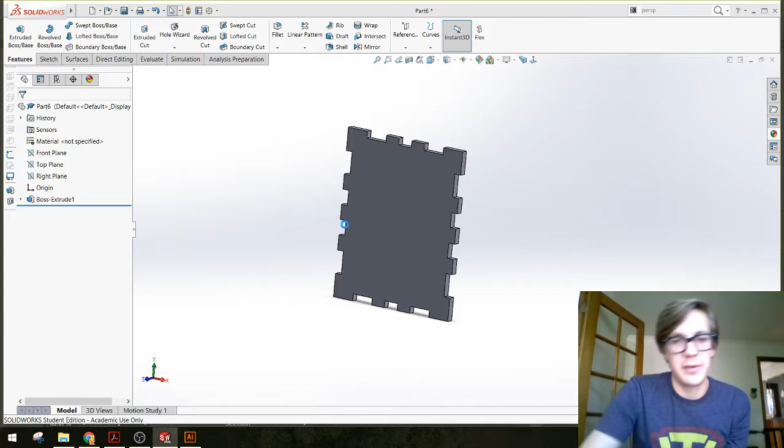Okay, so I think that sort of ends my demo for today. I'm going to check the email one more time to make sure there aren't any questions, but we've covered a whole bunch of great stuff. Namely, we have talked about creating independent part files and assembling them together in an assembly file in SolidWorks, doing so using mates, creating part files within an assembly, and using other parts as reference to make sure everything lines up.

We've covered how to create 2D geometry outside SolidWorks, either from a website or using Adobe Illustrator, and then from inside Illustrator, exporting it as a file format, DXF, that SolidWorks likes, importing it, and then using it to create a sketch inside SolidWorks to make things. That's a really powerful tool. Actually, all of these are very powerful, and I'm sure we're going to keep using assemblies and mates and imported 2D vector geometry throughout the rest of our course.

And hopefully, this live stream is going to work out just fine. I don't think my face was big the entire time. So, all right. Switch back over to mail really quick. Make sure there aren't questions. Doesn't look like we have any new questions.